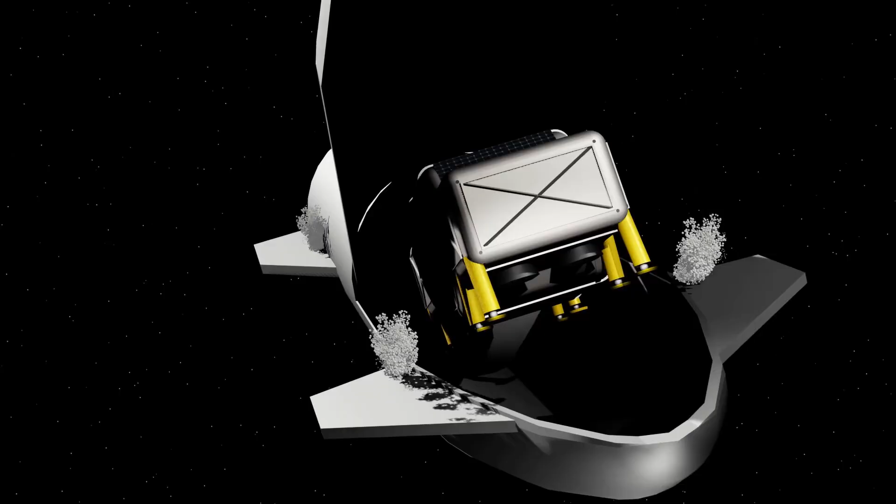Given the technological advancement in launch vehicle capabilities and the constant search for interstellar resources, companies have begun research for a lunar lander capable of setting up permanent infrastructure on the moon to achieve these goals. Plush is the perfect solution, providing unprecedented cargo delivery potential whilst capitalizing on current active technologies.

As of early 2025, the largest payload ever delivered to the moon was 5,500 kilograms aboard Apollo 17. Plush is theoretically capable of delivering up to 40,000 kilograms, an increase of approximately 730%. Plush is intended to pioneer the settlement of permanent infrastructure on the moon.

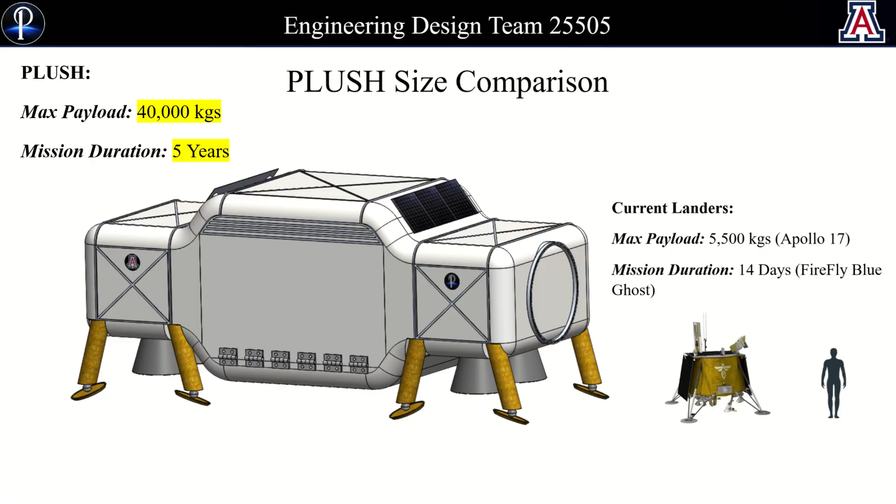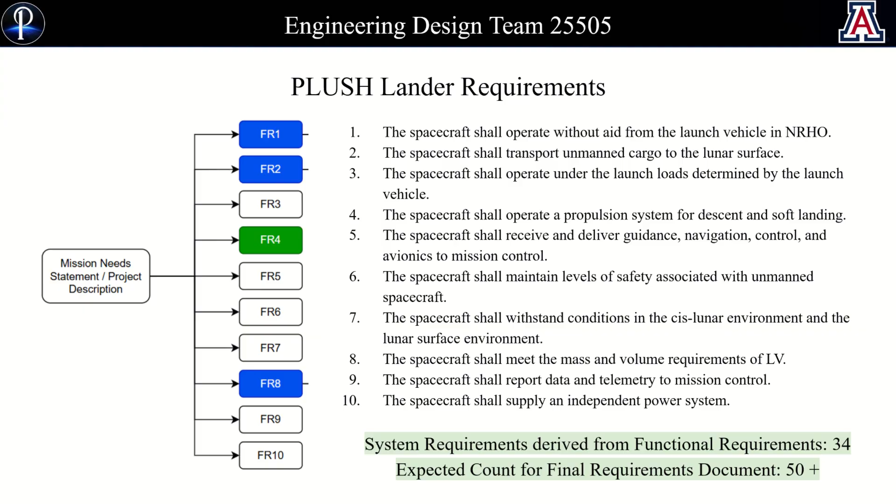The objectives of the project are to create a comprehensive CAD model for the structure and frame of Plush, as well as prototyping a subsystem, which came to be our reaction control subsystem prototype demonstrator. Major requirements driving the conceptual system design are the following. The lunar lander shall withstand the SpaceX Starship Super Heavy launch profile. The lunar lander shall not exceed a total wet mass of 200,000 kilograms. The lunar lander shall fit within the launch vehicle.

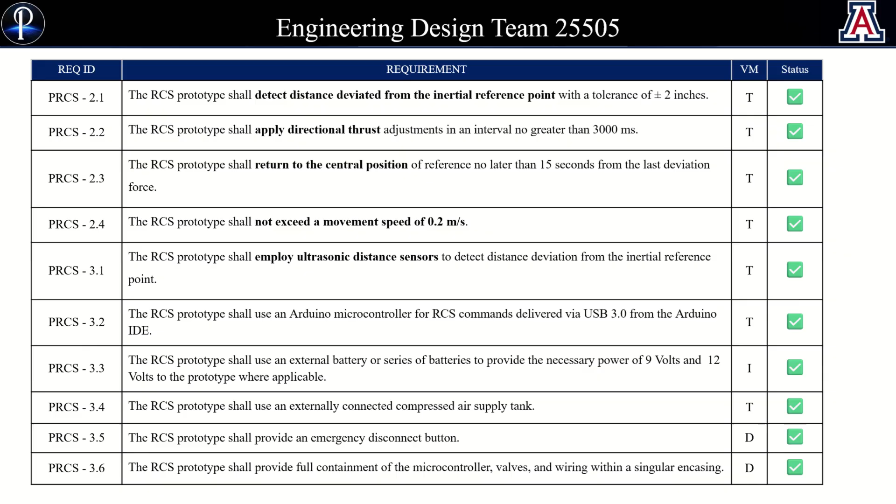Now, major requirements driving the system design for the reaction control system prototype are as follows. The prototype shall return to its initial spot within 15 seconds. The prototype shall use high-pressure air to achieve 2D movement and rotation. The prototype shall be fully contained within its frame. All requirements listed in our requirements document deliverable have a method of verification as analysis given the conceptual nature of our project.

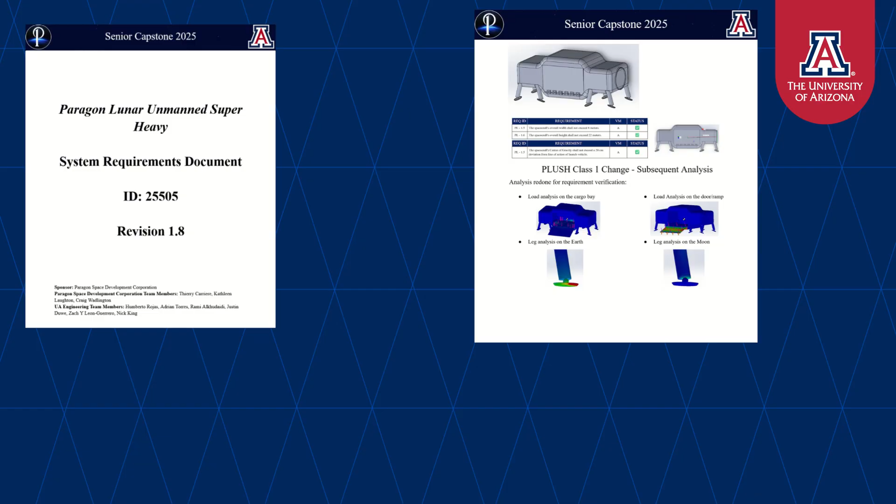Our deliverables are divided up into three parts. The first is a requirements document which clearly defines a set of requirements for the lander structure and frame, landing stability, and shock absorption. The second deliverable is a conceptual design report which summarizes the proposed high-level design, including landing gear, primary structure, launch vehicle interface, and cargo bay organization. And our third deliverable is a presentation of findings which concisely presents the project's results, challenges, and next steps.

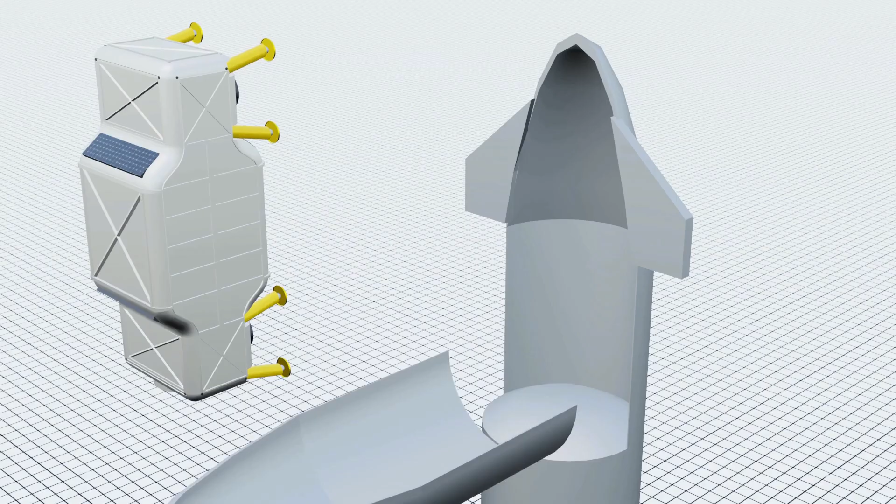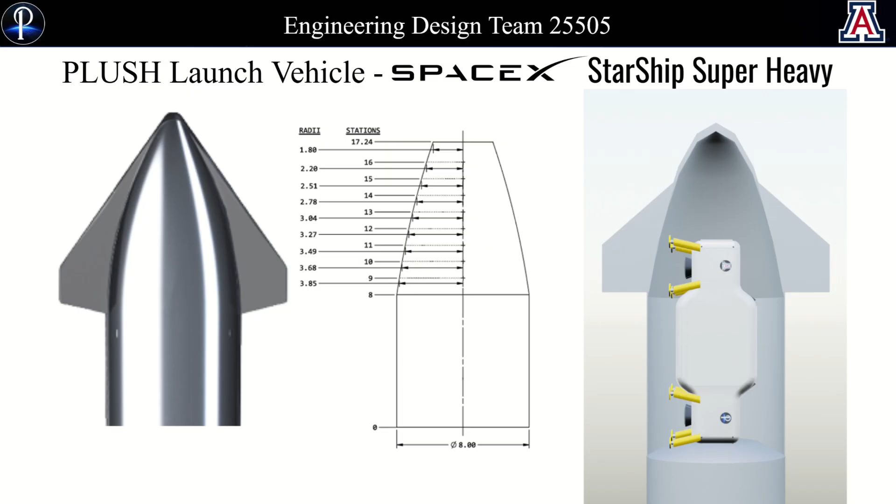To be able to design the lunar lander, we had to work backwards, starting from our launch vehicle, SpaceX Starship Super Heavy. After deciding on the launch vehicle, the immediate constraints placed on our lander were dimensional, as we must fit within the payload bay. This spearheaded the design along with the expected cargo capability. Very shortly after setting dimensions, we conducted trade studies on material and vertical versus horizontal landing orientation.

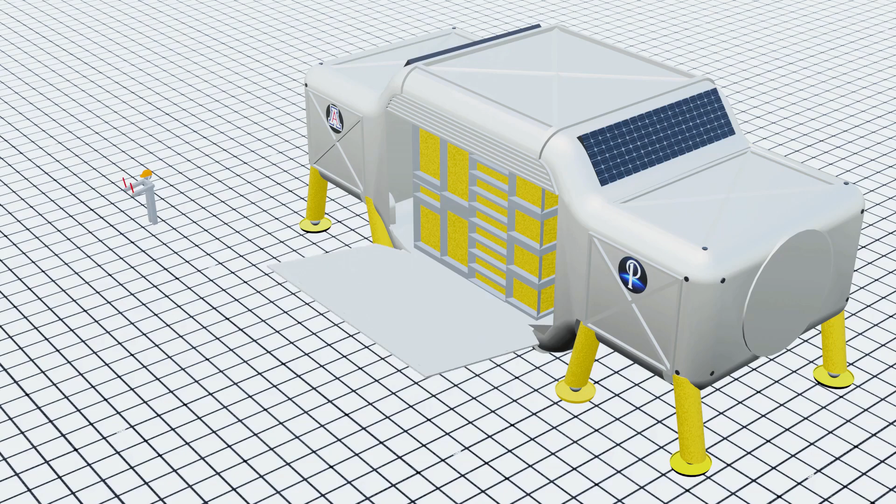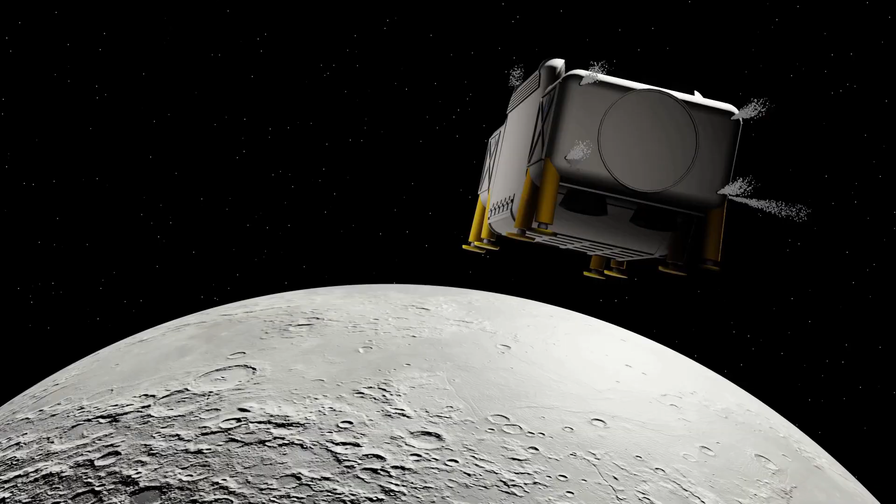All requirements for the conceptual design of our lunar lander were verified, ranging from the constraints imposed by the launch vehicle to the payload capability, all the way up to the cargo bay division and organization. The RCS, or Reaction Control System, is a key component of any spaceship. It is what allows a spaceship to remain oriented in the correct direction for such maneuvers as burns or landings. Without an RCS system, your rocket is unable to maneuver itself to avoid rocks in landing or to maneuver towards the proper burn location.

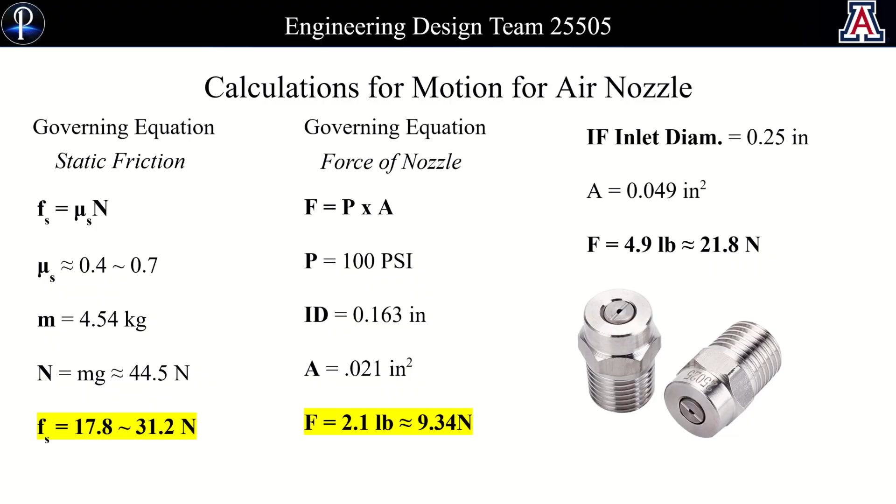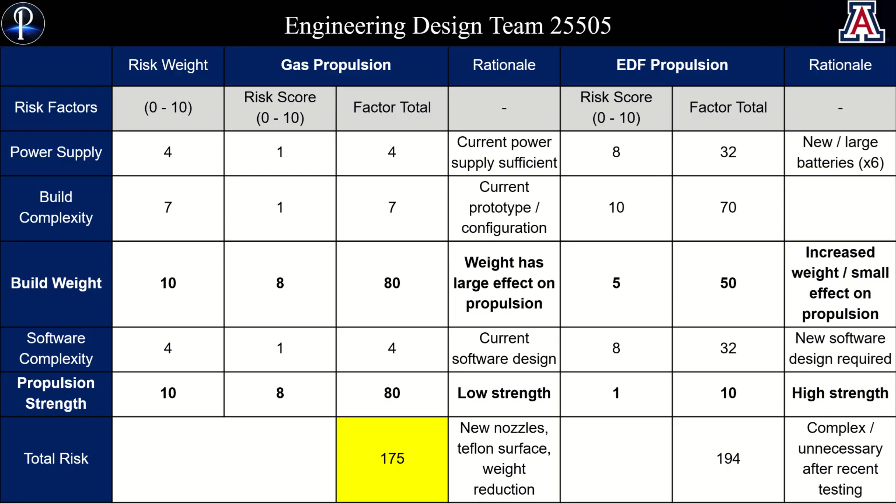In order to figure out what pressure we needed to push through our nozzles, there are a number of calculations to be done, including the cross-sectional area of the hose and what the friction of the surface is. In our first round of calculations, we failed to account for the fact that the size of the tubing was given for outer diameter instead of inner diameter, leading to no movement due to lack of force. One of the proposed solutions on how to make sure that our prototype could move was to switch from high-pressure air to electronic ducted fans, or EDFs. After a trade study found the EDFs to be unviable, we switched back to using high-pressure gas and used pressure washer nozzles to collimate the air, which did allow for movement of the prototype.

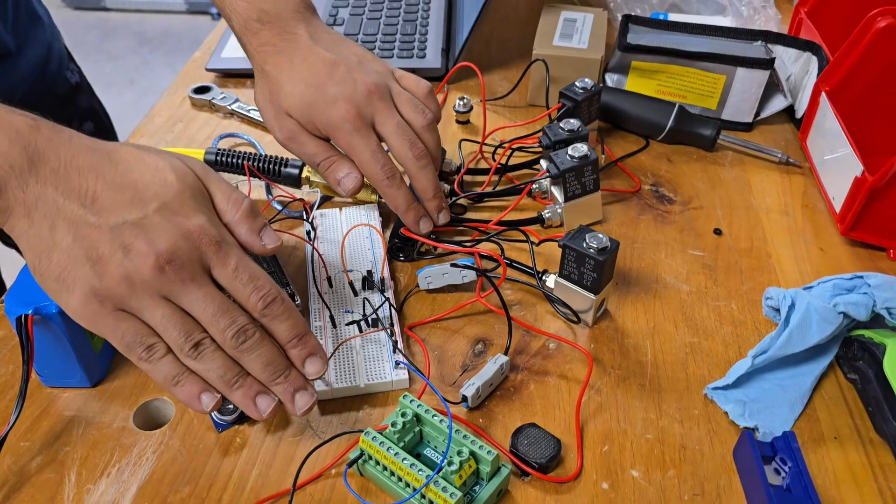Here you are looking at our reaction control system prototype. Our RCS system is a small mobile prototype that's moved on a flat surface using compressed air. We use 8 solenoid valves to push the box in different directions. The valves are driven by MOSFETs, powered by batteries and controlled by an Arduino.

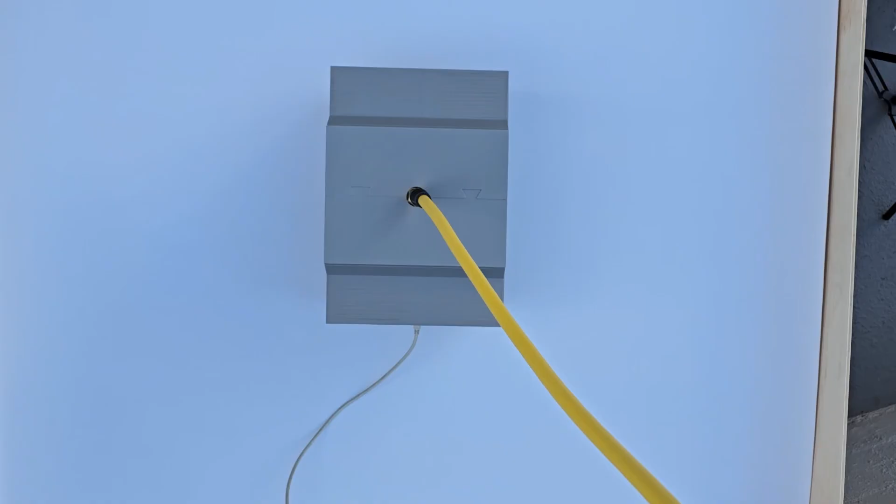We also use a distance sensor and gyroscope to measure how far the box is from the center and how it's oriented. In the software, we used a PID controller on the Arduino to process the sensor data and decide which valve to activate and for how long. This helped the system correct its position and move smoothly.

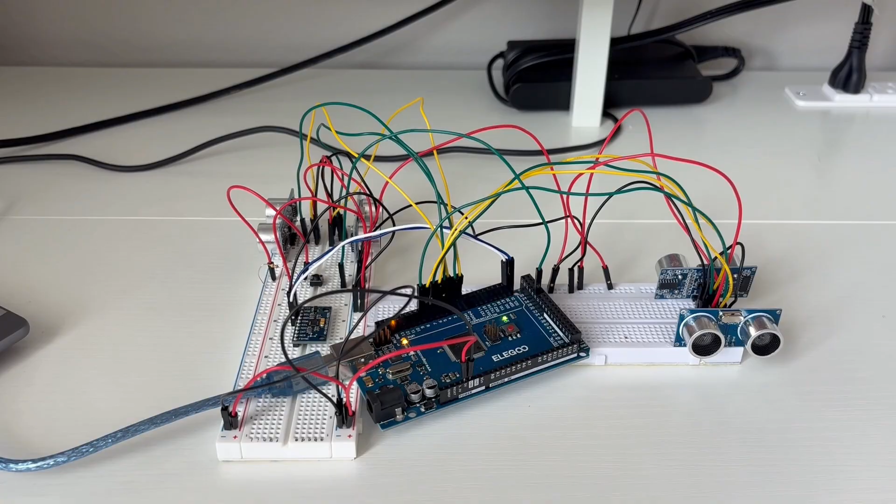So, my role in the development of this project was to create the PID control algorithm that will model the reaction control system in our spacecraft. This will be loaded into our prototype to demonstrate movement. We first started with a one-dimensional control algorithm and then moved to two-dimensional and rotational with corresponding testing at each phase. We used common Arduino libraries to help us interface with our external sensors, and we also generated 2 custom structures to help us track our positional state and the PID control calculations.

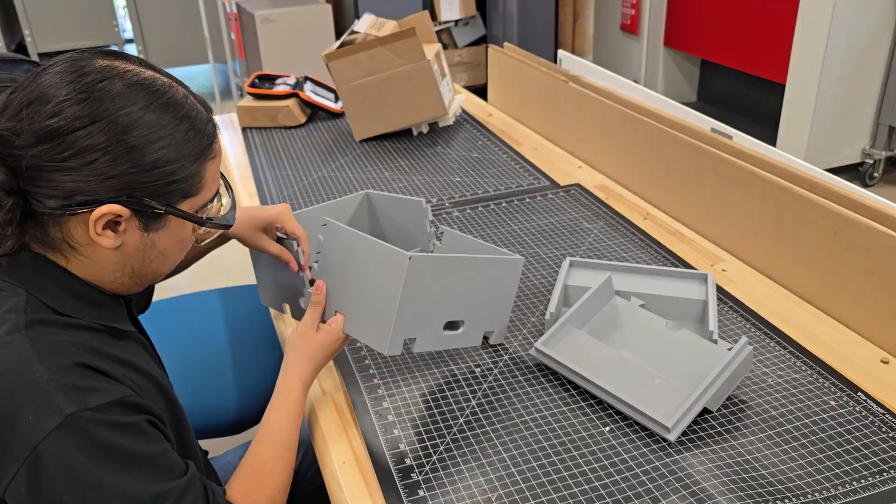The software consists of a main driver sketch along with the state structure and PID structure, sensor reading and processing algorithm, control processing algorithm, and thruster output control algorithm. The general theme of our problems in this project was how do we optimize our system? Even if it worked, the RCS prototype was inefficient or, at its worst, immobile.

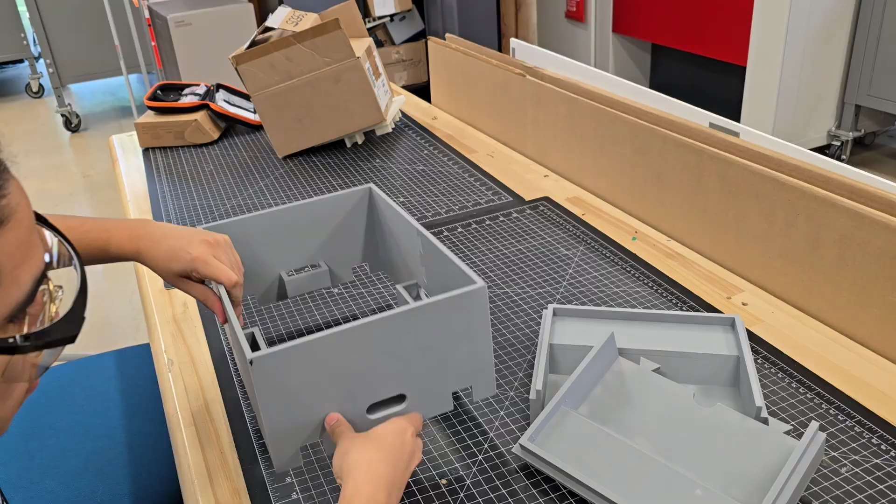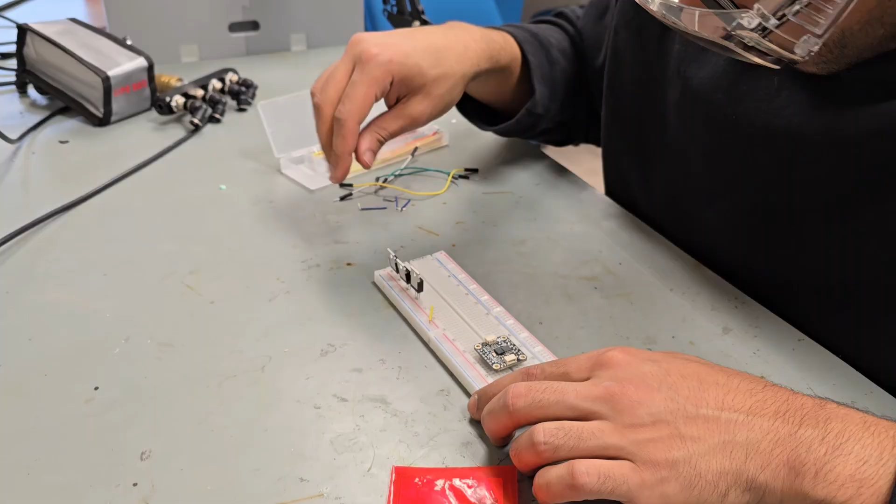We had to further modify our system to increase movement, such as reducing the weight of the frame, adding a low friction material to the environment, utilizing the Venturi effect to exchange PSI for velocity, and upgrading our nozzles, gyroscope, and accelerometer. We came to understand that individual components have a compounding effect on the end results, and that the exclusion or shortcomings of one can be the difference between success and failure.

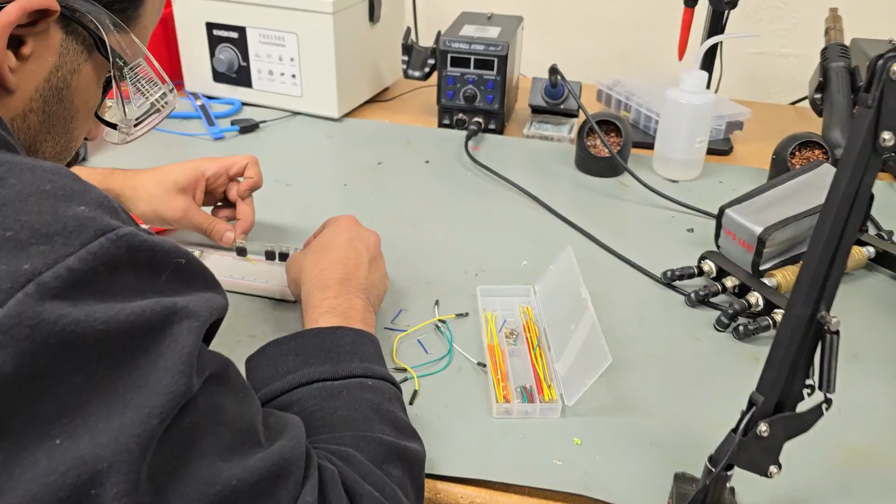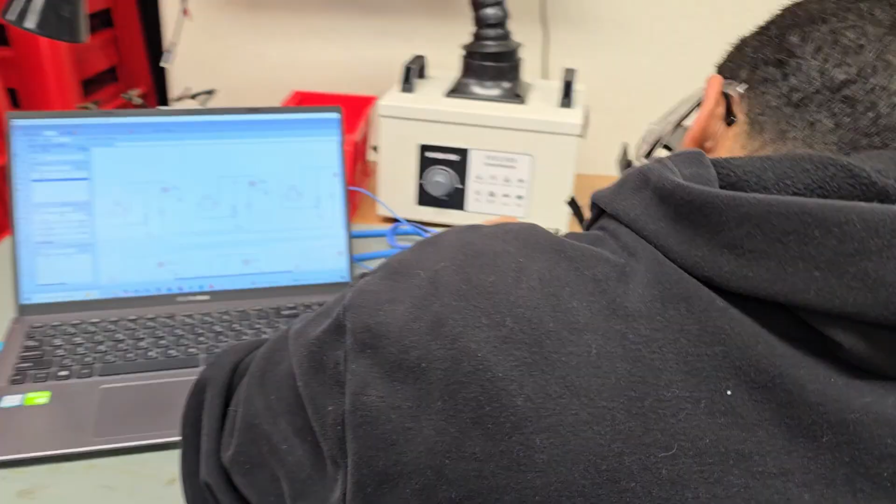Overall, we have established the foundations for a lunar lander designed to carry heavy cargo and calculated its theoretical capabilities. We have also designed the Plush's reaction control system algorithm and have established functionality within a 2-dimensional model. There is still much work to be done for our sponsors and any future engineering teams assigned to this project. We wish them good luck.